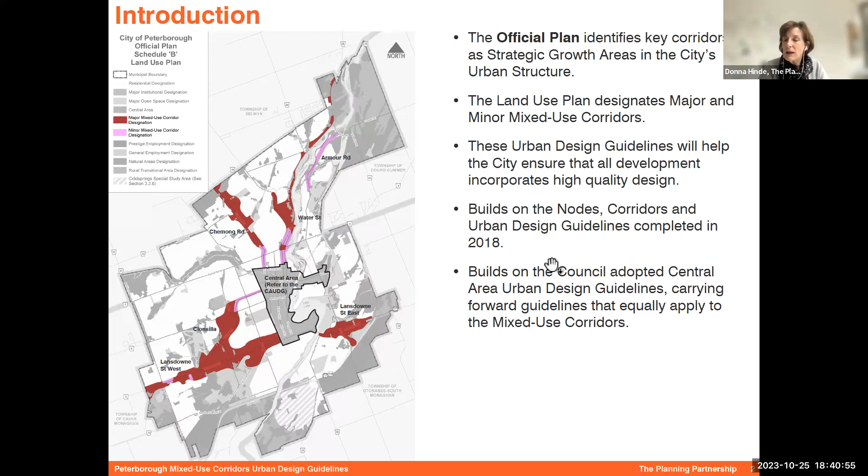That formed a bit of the foundation of the official plan. So what you're going to be seeing tonight builds on the guidelines already adopted by council for the central area, and we carry forward any of them that are relevant to these corridors into this document we're looking at tonight. The guidelines are intended to help staff evaluate applications when they come forward.

How well are they meeting the various guidelines outlined in this document? It's intended for city staff to use for their own projects to guide more detailed planning and design on streets and parks and trails. They're intended to provide greater clarity. We often hear, especially from the development industry and their consultants, just tell us what you're looking for. And so that's the intent of these guidelines.

Clearly lays out what the city and council are looking for. They are inherently flexible, so it depends on having great conversations, great collaboration by a very talented city staff team and an amazing suite of consultants already working in Peterborough. They reflect the best planning and design principles from our decades of experience developing guidelines like this.

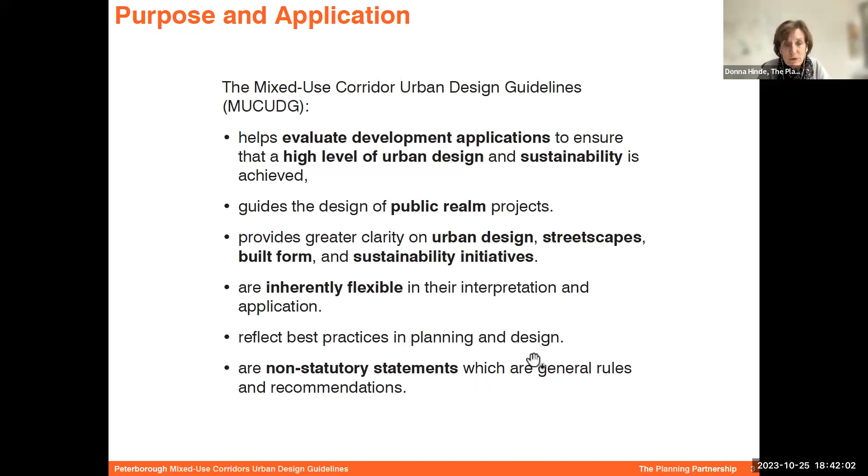So it's really important to remember they're non-statutory statements, general rules and recommendations. The foundation of the guidelines is based on a notion of compatible development. They are intended to help develop projects that reinforce the desired future and existing character of neighborhoods along the corridors. They're based on a contextual approach that considers impact and relationships on the context.

There is a definition in the city's official plan about what compatible development is, and it doesn't mean it's exactly the same or even similar to existing development, but it has to prove there's no undue impacts from overlook and shadows and impinging the scale of new development on old development. So it has to prove there's no impact on adjacent development.

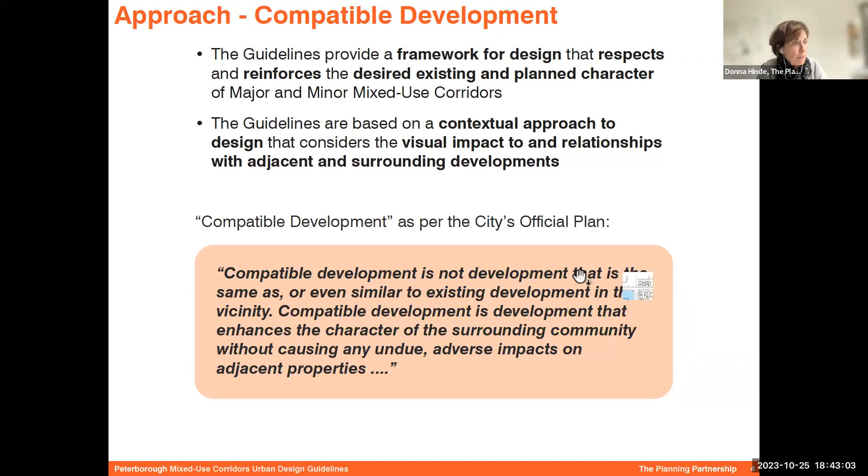So we developed diagrams to illustrate various scales, various areas you'd look at depending on the scale of redevelopment proposed. If it's major or large scale redevelopment, as on the left of the screen, this light blue area - the dark blue suggests that site is being redeveloped - and so you would consider the impacts within this large blue area to make sure the development being proposed is indeed compatible with everything within that light blue area.

If it's more minor redevelopment, you can see exactly the same map, but when it's more minor, we're looking at several blocks in each direction. And if it's just redeveloping one house on a lot or an extension or adding some kind of addition, then it's just the immediate properties that abut that site. So it's really important that scale of influence area is responsive to the scale of development being proposed.

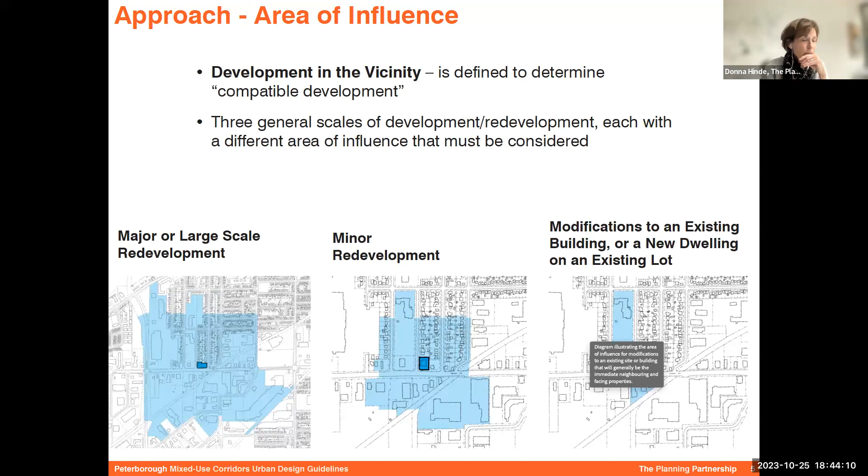Guidelines have 6 principles that are foundational: trying to make connections along the corridor and to key features and destinations off those corridors, to define gateways and entrances so the corridors take on a bit of their own special, unique character, and that we make streets for people.

Along the corridors now, it's a very harsh environment for people that dare to walk on the sidewalks or ride their bikes. So we're trying to make it more pedestrian and cyclist friendly, making sure wherever there's views to significant places that they're protected, that we foster a unique sense of place on each corridor, and that, like everything we do in Peterborough, the projects are inclusive and equitable.

The mixed use corridor urban design guidelines, MUCUDG, have 5 main chapters, and I'm going to walk through each one individually, then we'll pause. We'll talk about guidelines for buildings, green infrastructure for buildings and public places, tree planting guidelines, street guidelines, and guidelines for parks through redevelopment on the corridors.

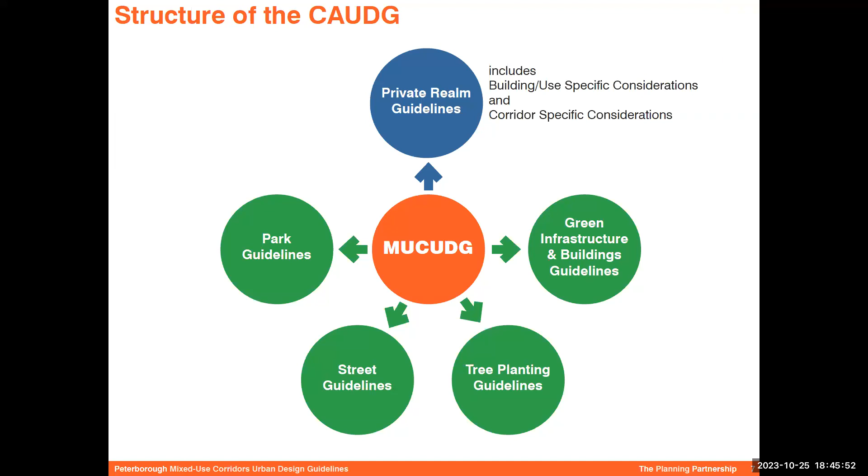So just before I get into the content of the private guidelines, any questions or clarification required on the introduction, how it's set up, the purpose of the guidelines, or the subject area of the guidelines? Okay, I'm going to push on.

We're going to start with the private realm guidelines. Private realm guidelines are for any development that's privately owned. So we look at recommendations for anything to do with the building, where it's located, placed on the site, what its height is, how bulky it is, where signs are, what special features could you add to define landmarks. We look at a whole suite of recommendations for the site.

Where do you access parking lots? How is that site serviced? How is it landscaped? Where might public art be located? We have specific direction for specific building types like townhouses, stacked townhouses, mid-rise, higher rise, commercial buildings, automobile focused uses, drive-throughs. These are the kinds of buildings we're anticipating will evolve along the corridors over time.

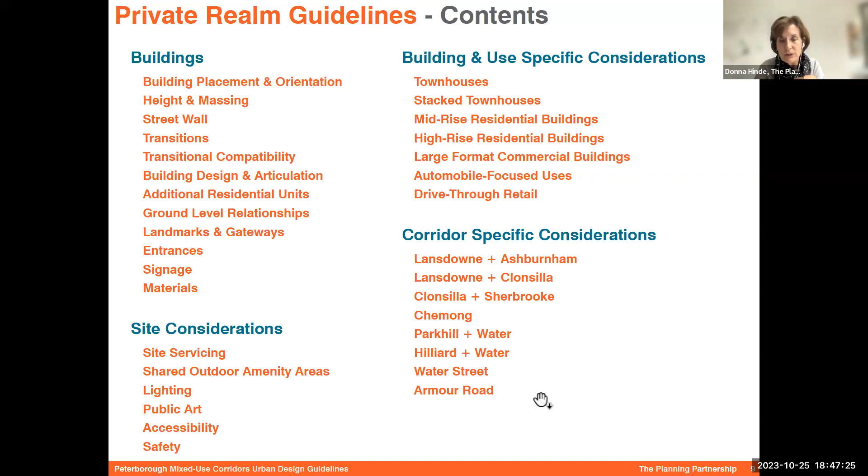I see a question in the chat box about how the guidelines are flexible, so I'm going to show you a couple of examples along the way to demonstrate that. In this section, we also have specific considerations for the various corridors where they have specific conditions or characteristics that are worth responding to in the guidelines.

I'm going to walk through the recommendations for building placement and orientation. The reason we pay special attention to this in the guidelines is because it's one of the biggest components of defining the character of the street. So if we can start to define these big roads with buildings as opposed to large swaths of parking lots, it changes the character of the street.

Wherever possible, we're wanting to bring the building as close to the street edge as we can. The height is another tool that can help reinforce the character of that street edge and make a more appealing street experience. So we're looking for opportunities to add some consistency of height and mass of buildings along those corridors as they evolve over time.

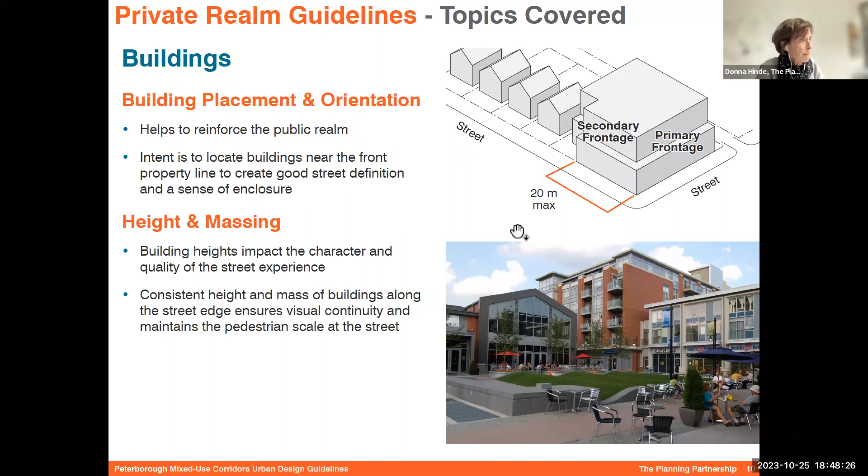The street wall - we're defining what that is: the front of the building. We're recommending a 2-story minimum, and that above 4 stories, the building would step back. This is so the taller buildings don't impinge their scale on the sidewalk and people walking on that sidewalk, helping make a more appealing environment there.

We want the building facades to be articulated so that it adds some interest to the sidewalk. We don't want just blank concrete block walls slammed up to the edge of the sidewalk. We want there to be windows and doors and some articulation in materials along that facade.

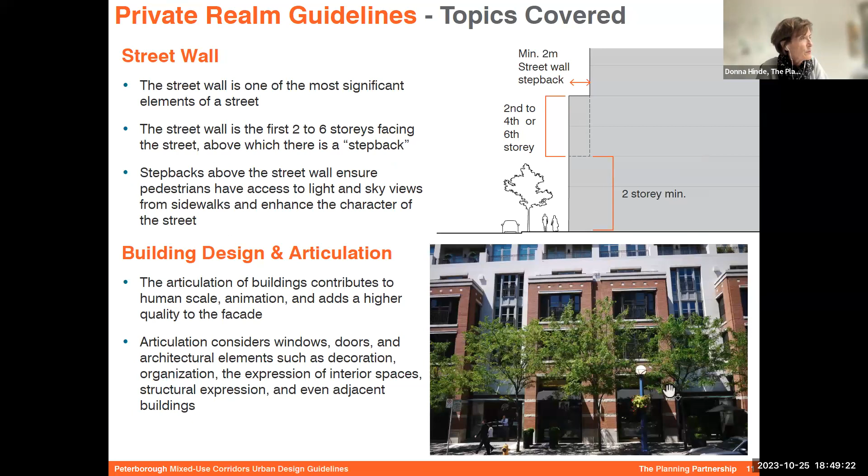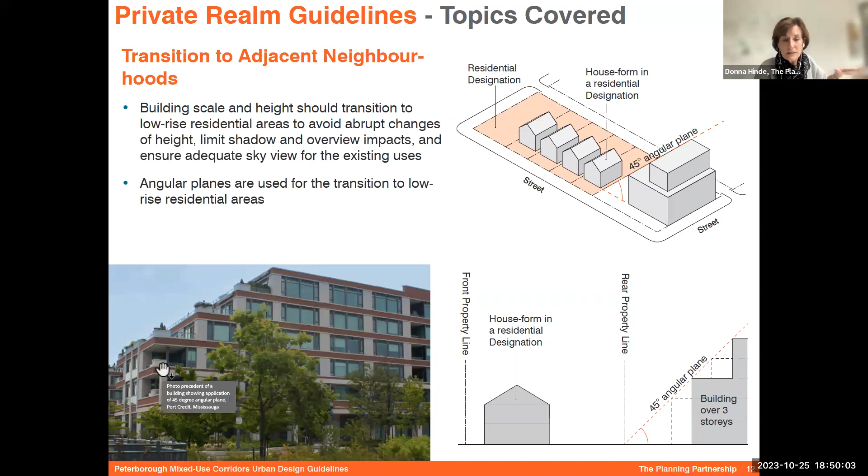For site access, let me go back to transition. We are particularly mindful that when the corridors' frontage redevelops, many times they abut residential neighborhoods or other neighborhoods. So we want to make sure there's a transition, especially if there's higher density on those corridors, to the adjacent neighborhoods. We're applying a tool called an angular plane, which helps shave the building back, especially on the back, so there's a gentler transition to buildings that are often of a lower height. You can see in this photograph where the building is stepping down, transitioning to an adjacent neighborhood with lower buildings.

The guidelines address where driveways come in and where parking is located, because as I mentioned, parking is the single biggest element that destroys the character along a street for people that are walking and cycling.

Often if there is higher density development, there might be new forms of open space. Some of that new open space can be shared amenity outdoor areas, and we want to give some direction for that. Lighting should be fully integrated into the development, dark sky friendly, and make a positive contribution to the character.

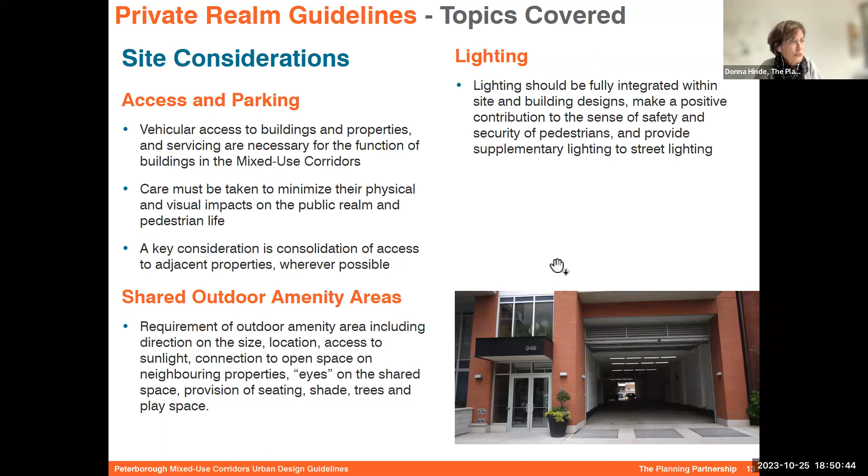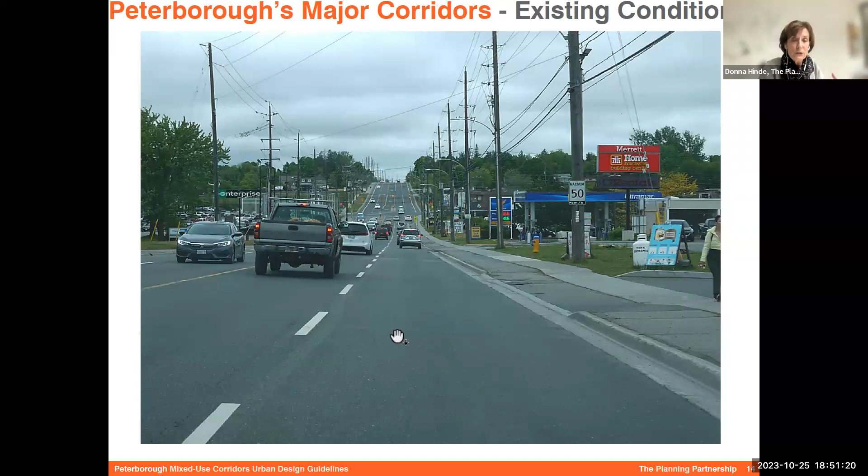When we look at the corridors on Peterborough, this is typical of the kind of condition. They've evolved through the 50s and 60s, when we had completely different priorities and pressures than today, where the city is trying to accommodate new, more people, a different form of development, and a more urban character on these roads. Across all of Southern Ontario, every municipality we're working with is struggling with the same thing, putting together direction that can guide the long-term evolution of corridors like in Peterborough.

I put this one in, a screen capture from Google Maps in Markham - this is Highway 7, equivalent to any of the big roads in Peterborough. This is a plan view of a development on Highway 7, and I'm marking out where the buildings are along it. What's intriguing for me, looking at it a second time, is all the green roofs - that's a kind of thing that can be recommended in the guidelines.

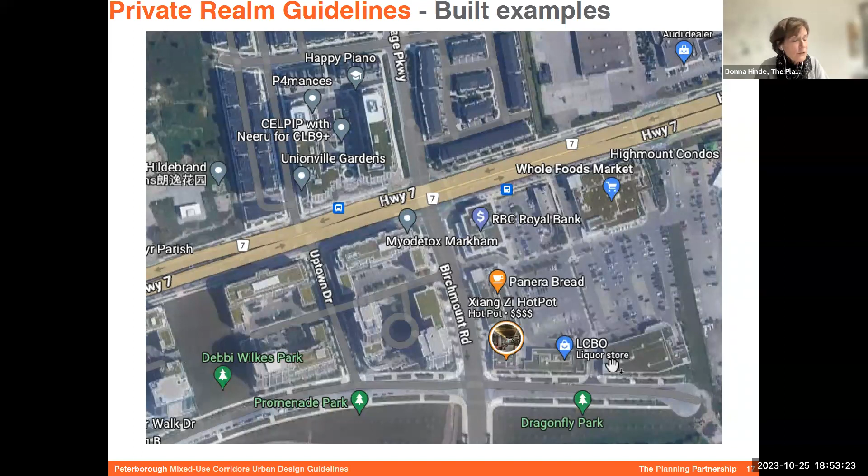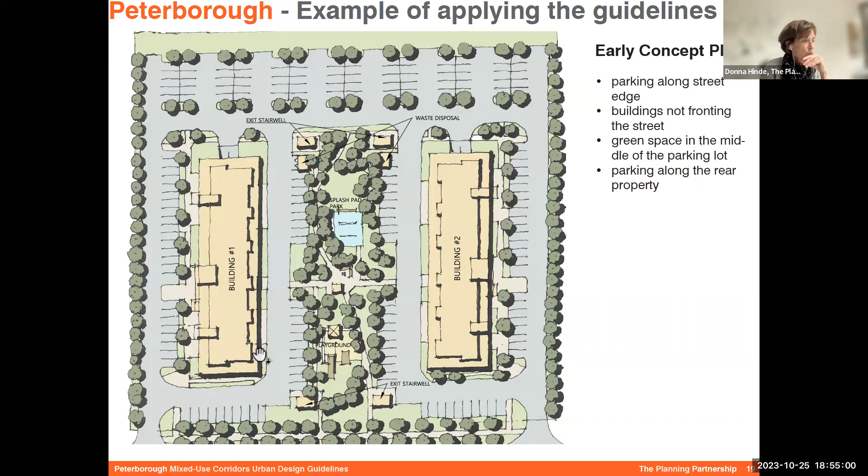I want to go back and share an example of the city already applying the guidelines in its early iteration - a development application they got for a site on Lansdowne. This was the first plan that came in from the consulting team. It had residential buildings perpendicular to the street, with parking along the street - Lansdowne is at the bottom of the page. They rightfully showed a clear sidewalk lined on both sides with street trees. They have parking across the back, which sometimes doesn't make a great transition to adjacent uses, and their open space is centralized as well, along with parking.

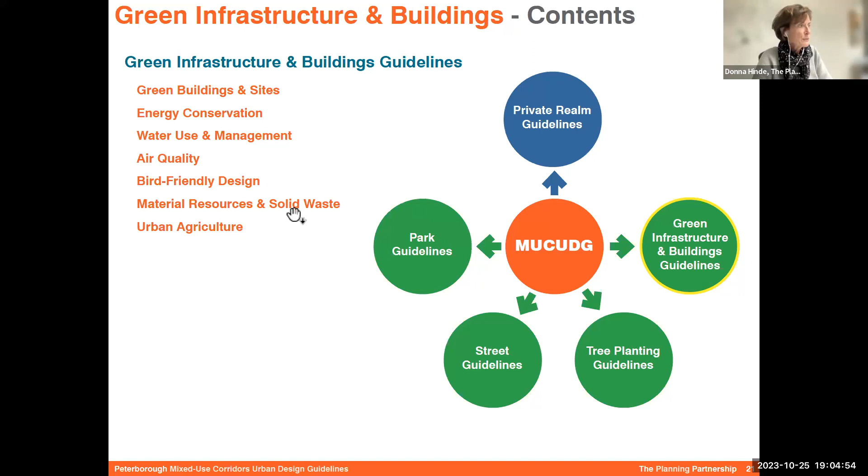Green walls, solar panels, water use and management — we're looking at reducing impervious surfaces wherever possible so more stormwater can be absorbed, reducing and treating runoff to protect the natural water courses.

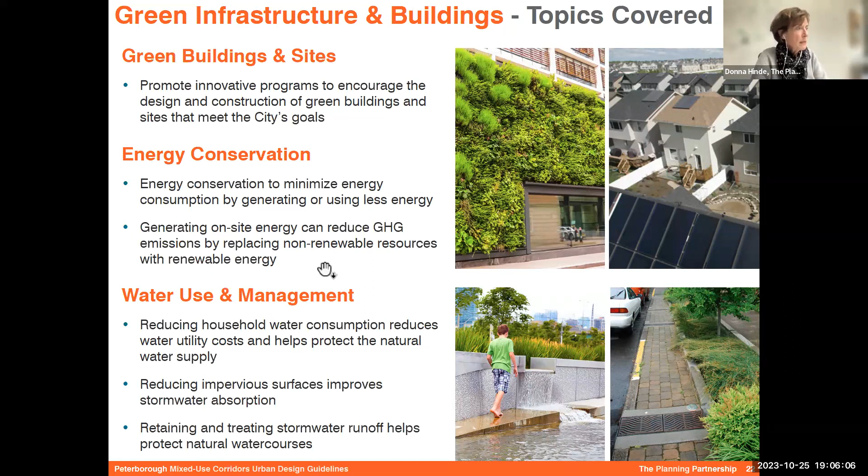Energy conservation: we're looking at opportunities wherever we can to generate on-site energy to reduce GHG emissions and replace energy sources with renewable energy. The guidelines speak a bit about air quality.

They talk about bird-friendly design by considering light pollution. We also talk about material resources and solid waste.

We're looking at when development applications come forward that they have an idea of how they're going to maybe reuse materials that are already on the site.

And urban agriculture, such as community gardens, wherever there's an opportunity to incorporate community gardens into parks and public spaces. That's a terrific use for green space, and it can often be a great transition between uses.

That's just a quick summary of what we have in the green infrastructure and green buildings chapter. I'll just give it a second to see if anybody's raising a hand or putting something in the chat.

So a question in the chat box: how will the programs to encourage green buildings, net zero, be developed, and when? Maybe Nicole or Caroline, is that a question? Do you have guidelines for achieving net zero?

Yeah, I can briefly touch on that. That's kind of extending a bit beyond this guideline. While we do touch on it, we are kind of encouraging it. This is certainly not the document that's going to prohibit or require. It's not forceful statutory requirements, as we talked about.

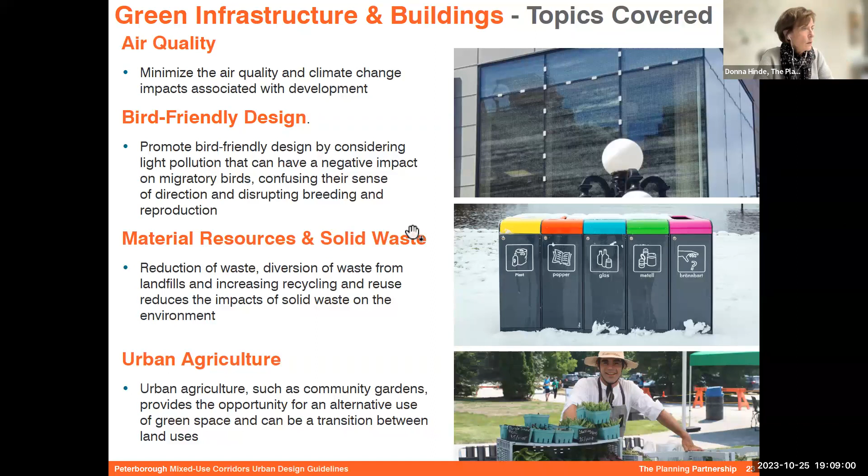Okay, let me push on to now talking about the tree planting guidelines. While we were preparing these guidelines, city staff were also doing a separate document to update the city's tree planting guidelines for across the city, so we were working in tandem with the direction they were developing for the city's own tree planting guidelines.

So in the mixed use corridors, we're looking at the urban forest as a system: the species that we're selecting, where trees are located and how they're spaced, the special soil required, the planting typology details, specific planting in natural areas or along the water's edge, and then recommendations for tree preservation.

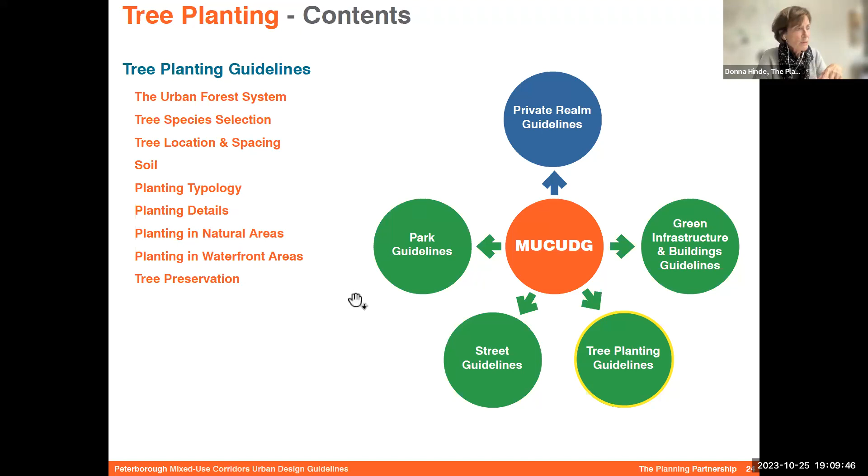With respect to the urban forest, the guidelines are intended to promote the principles of biodiversity and growth rate stratification when selecting tree species, so we want variety. The intent is to establish a resilient urban forest with a diversity of species.

And we know that this is a priority for the city, where the guidelines address species selection, the intent to avoid monoculture plantings. The tree species selection intended to support the potential for mature trees, so that the trees are going to be healthy from the point at which they are planted well into maturity.

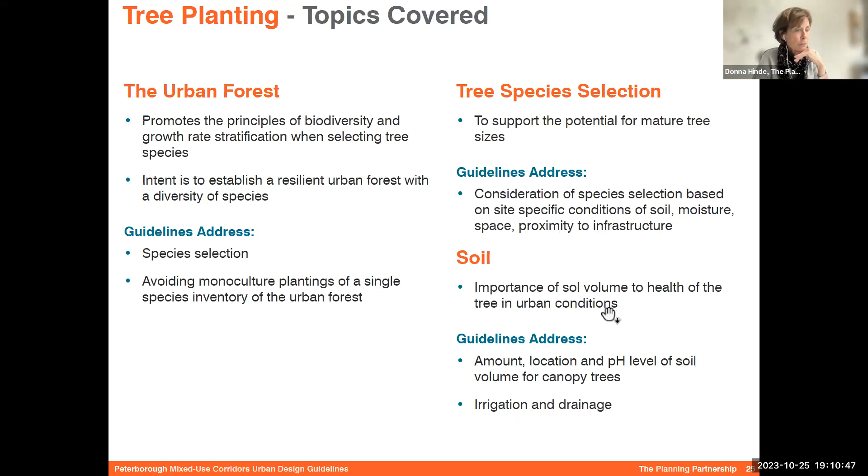The importance of the soil composition and volume to health - the way landscape architects and arborists plant trees now is completely different than it was even 10 years ago. The planting typology includes the use of structural soil cells to make sure there's sufficient volume.

The details - like I mentioned, the city's been doing a terrific job updating their citywide tree planting guidelines, so they've got a terrific amount of detail in that document that our work cross-references.

There's some recommendations specific to particular landscape types, whether it's in and around a natural area or along the water's edge of the river.

Tree preservation: obviously all opportunities to preserve trees are looked at early in the approval process, that the value is appraised, and that the preservation is based on identifying the critical root zone and protecting it through construction.

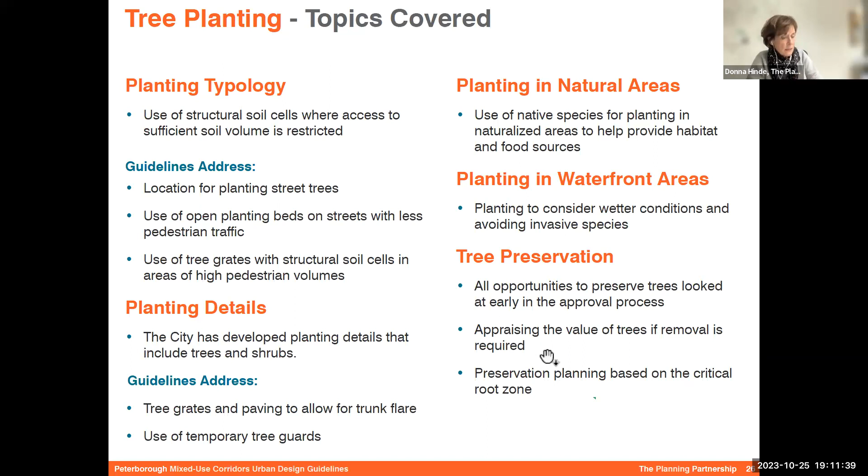I believe, yeah, that's the end of the tree planting section. I see we have a couple of questions in the chat box.

Province changes to our OP. Are these affecting the guidelines? And can we include wider scope in the guidelines than permitted now? Not sure, Nicole, if staff have really had a chance to digest the changes that came out this week.

Yeah, I can speak to that. Right now, what the province has announced, our understanding is it's just looking at the just over 60 modifications that they made. From a brief high-level look, we haven't dove into it deeper, but previously when those modifications came out and we were adopting the central area urban design guidelines, we reviewed them and there were no material changes required. We have 45 days to get back to the province and present the city's position on that new information, so we will be reviewing these guidelines to make sure no modifications are required, but we don't believe that to be the case at this moment.

And then in terms of climate resilience, I know that's something that came up during the official plan process. Yeah, so there's policies in the official plan that encourage climate resilience. Again, it's not covered in detail in this document, but it's certainly a consideration, and something the city would be looking to incentivize and encourage. It's not something right now under the current Planning Act legislation that we can require through site plan approval or other planning approval processes. But as we develop more policies, there may at some point be statutory requirements, or there may be incentives the city will put forward. The climate action plan is also currently being updated by the city, so we would look to that document to further inform climate resilience considerations.

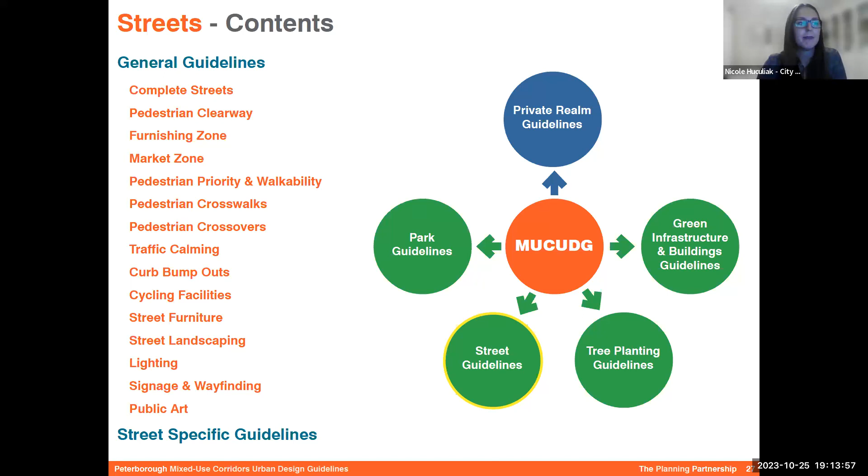Okay, and then the question about reference to tree species. The city's document that they were doing in tandem with our work is called Tree Planting, Installation and Establishment and Recommended Species List for Street, Park, and Site Plan Trees. So they've done quite a lot of work on identifying suitable species for various locations.

Okay, let's push on to the street guidelines. For each one of our corridors, we've started with some general guidelines that address many of the same component parts as the central area urban design guidelines, from identifying areas of pedestrian priority, the need for street furniture, and the role of cycling facilities and lighting.

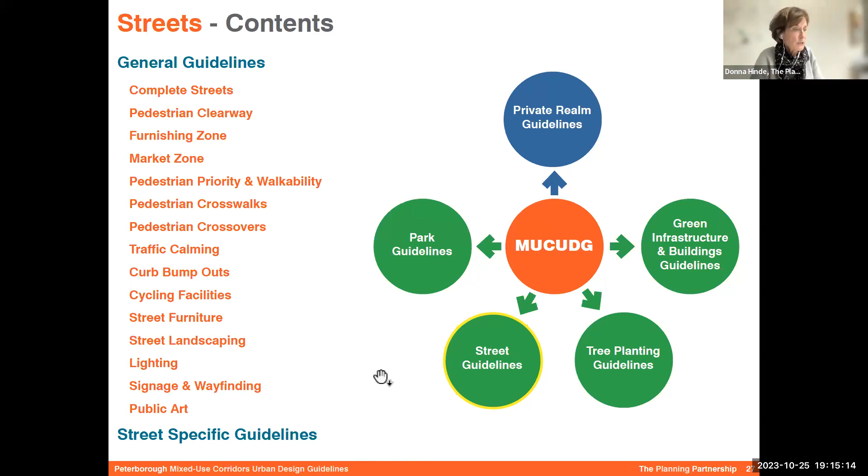But in the end, we also include street specific guidelines. We've gone through 13 different sections on the mixed use corridors. We start with a fundamental notion of complete streets, recognized in the city's own transportation master plan, designed to accommodate all users on the street, to make safe places for pedestrians, cyclists, all modes of travel, cars, buses, trucks, and how they can be designed as a complete and connected network.

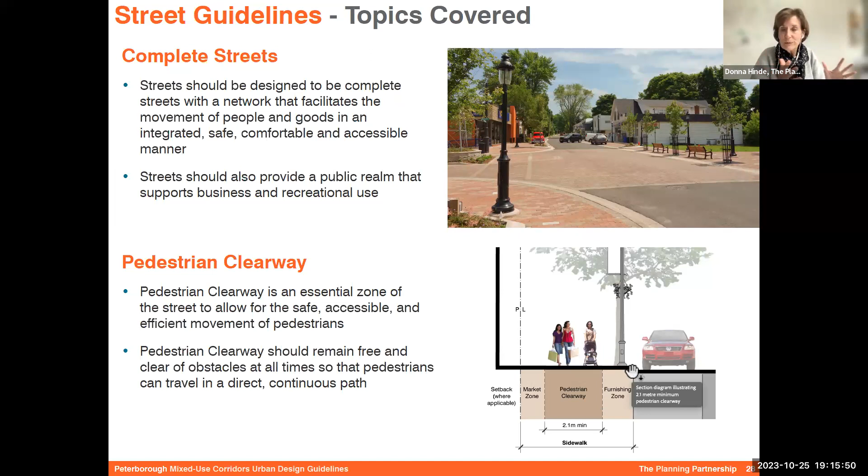The streets generally will be working hard to make sure there's a clear zone for pedestrians along the sidewalk, and along that pedestrian zone, a zone where trees are planted and often street furniture is placed. And if there are conditions along the corridor with adjacent street facing retail uses, we look at opportunities to have a bit of a market zone along that building frontage.

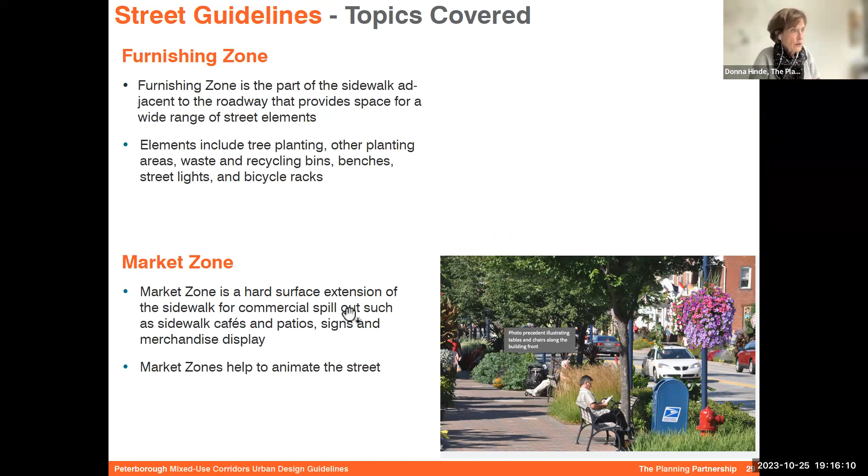Pedestrian priority and walkability is a priority because of the harshness of conditions along most of these corridors. So wherever there can be clearly defined and identified crosswalks and crossovers, where there can be priorities for people to walk, where there's medians or spaces in the medians so pedestrians can safely cross multiple lanes of traffic.

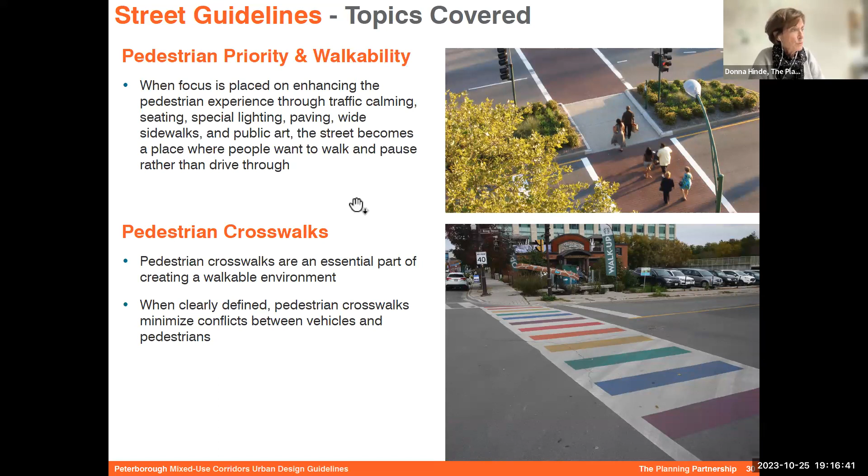One of the questions earlier was, is there opportunity for traffic calming to reduce speed? And absolutely, that will be done on a case-by-case basis as these roads come forward for more detailed planning and design. I'm sure the urban design team and planning team will be looking at every opportunity to add additional landscape and measures that might cause traffic to slow down a little bit.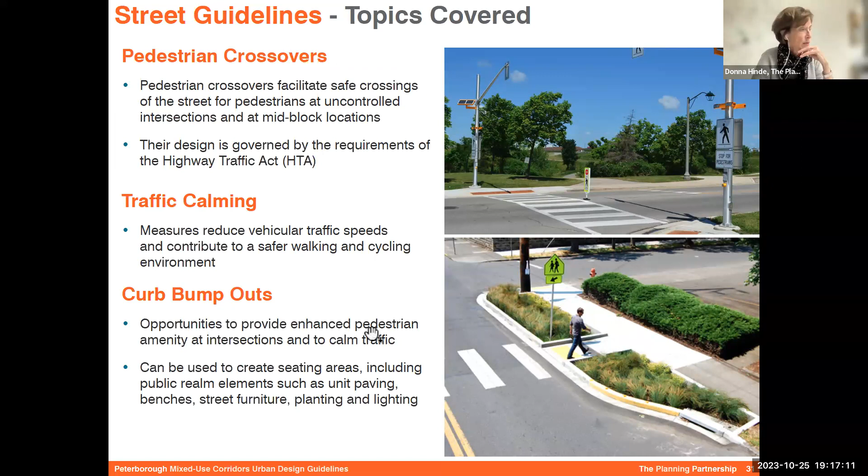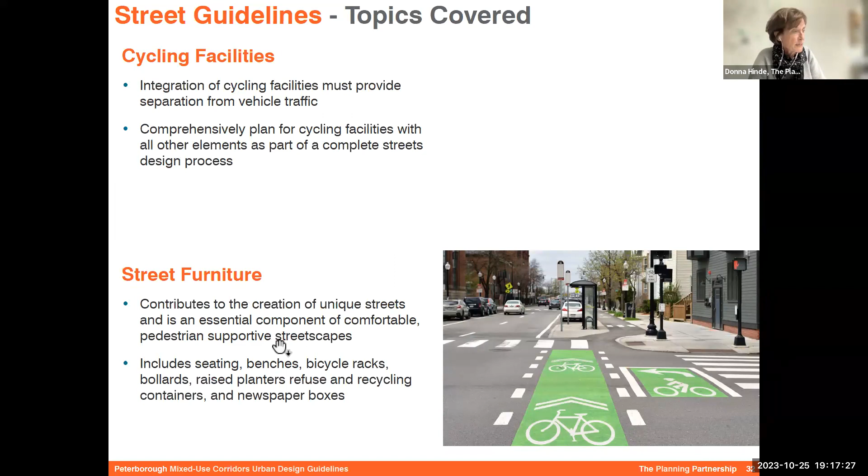Cycling facilities should be clearly marked on the ground and identified through signage. Wherever street furniture can be accommodated, it should be added - benches, waste receptacles, bicycle racks, planters. There should also be signage and wayfinding, especially along these big corridors where it's often difficult to figure out where you are in the city and which way is to City Hall, Little Lake, the mall, or Winners.

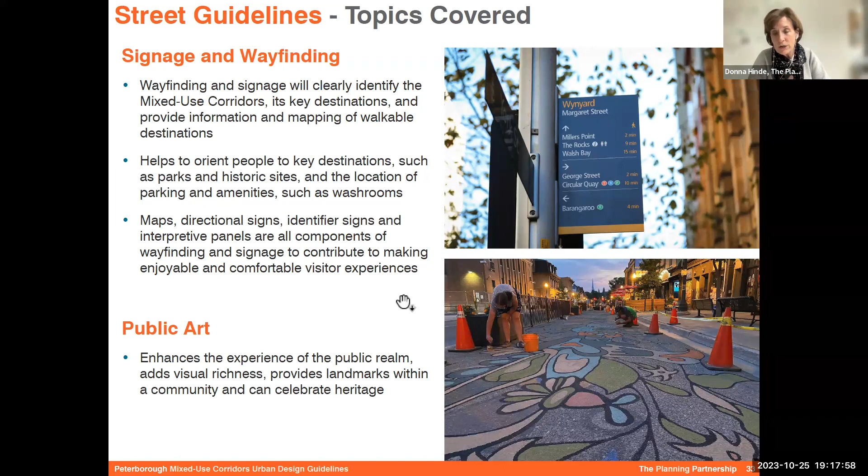So signage and wayfinding are really important at a scale suitable for some of these big environments. And not to forget the role of public art in helping to identify and mark these places as special and unique.

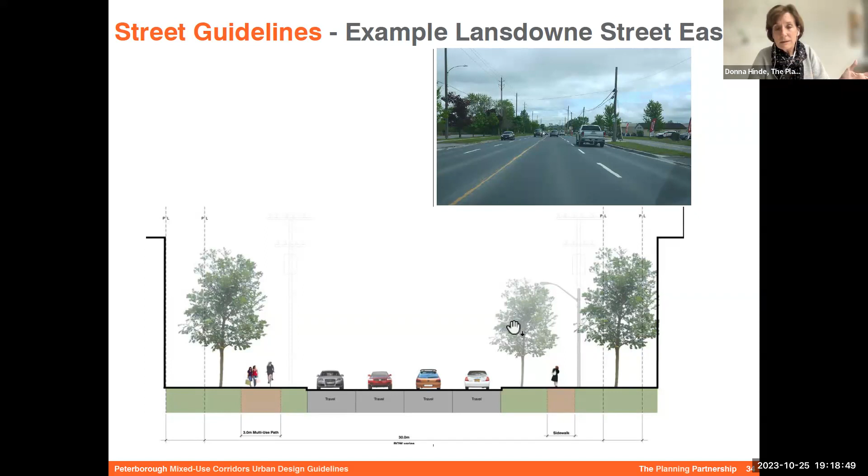So this is an example of the cross sections that we developed - I think there are 13 in total - where we look at various segments of the street. Then we allocate the space within the public property, within the road right of way, for streets and sidewalks, and sometimes mixed use paths for cyclists and pedestrians, and how travel lanes can be allocated within the real estate of the right of way. Sometimes we identify locations for trees that might be on private property, but that's where they can contribute to making the landscape along the corridor even better.

So, pause for a second on streets - anything in particular on streets? For cycling on roads, are there specific design guides for cycling infrastructure within the overall street design?

So we make some recommendations for the location of cycling lanes, but that will be further developed through subsequent, more detailed planning studies. And I know we've always had interesting conversations when it comes to cycling lanes on the street - Nicole, I don't know if you want to weigh in a little bit.

Yeah, so through this project and the streetscape designs, we're looking at the ultimate right of way and how to incorporate sidewalks and mixed use pathways, but we would not get into the detailed design of bicycle lanes. For that kind of detail, I would direct you to the Transportation Master Plan, which the city has been working on concurrently. We've coordinated this document with those working on the Transportation Master Plan so that they're not conflicting but complementing each other. That would be the document that gets into more specifics.

And Nicole, maybe you can help me answer the question from Sue about incorporating Indigenous languages in the wayfinding and signage in the city. I'm not sure if the city's developing a new protocol.

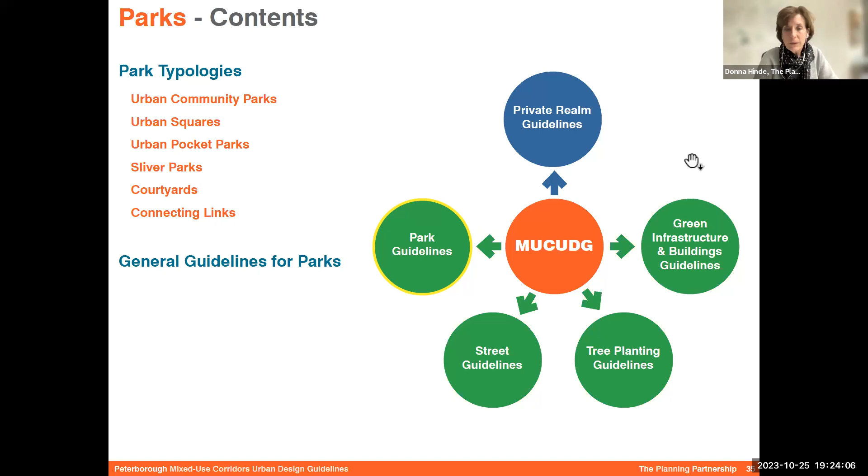All right, the last chapter of the document is park guidelines. We look at introducing urban park types that were first introduced in the official plan. It's a whole new hierarchy, a more urban character of parks. Along with community parks and neighborhood parks, the official plan said that with more urban forms of development, you're going to see more urban types of parks - urban community parks, urban squares, and one introduced in that development application example I showed earlier: urban pocket parks, which are smaller urban squares, urban parks, sliver parks, which may be narrower green spaces on private property that function as public space, courtyards in buildings, and connecting links, which could be green linear parks that connect one developed site to another.

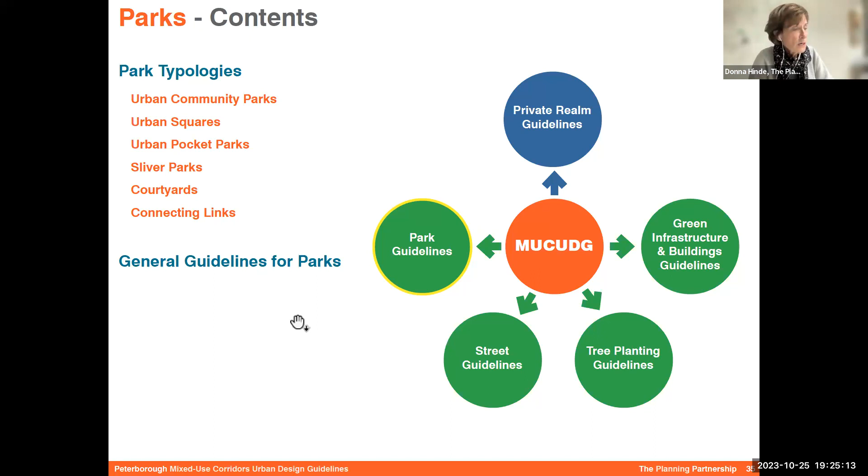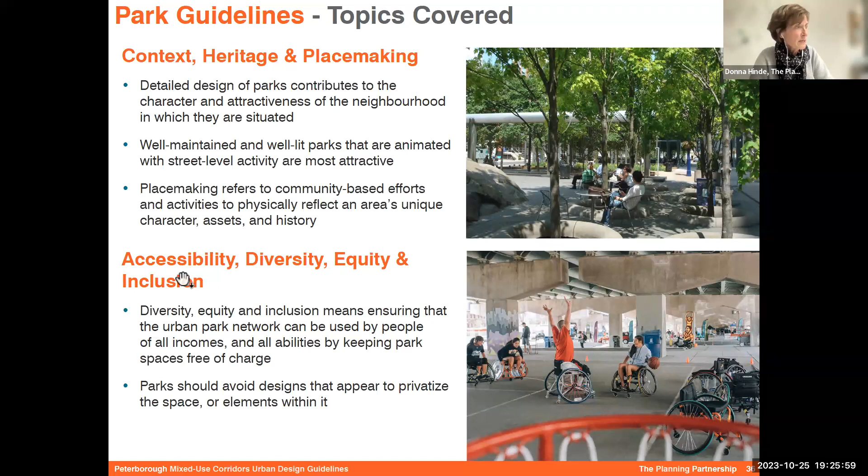Then we have general guidelines for parks in this section. They talk first about the context for that park and how it contributes to the character of the development, that it will be well maintained, well lit, animated with activities and programming. There will be placemaking that reflects community-based efforts and activities to activate that space. The city has really thorough policy on accessibility, diversity, equity, and inclusion, and they worked with us throughout development of the guidelines to make sure our recommendations reflected everything important with respect to accessibility, diversity, equity, and inclusion in the city's public spaces.

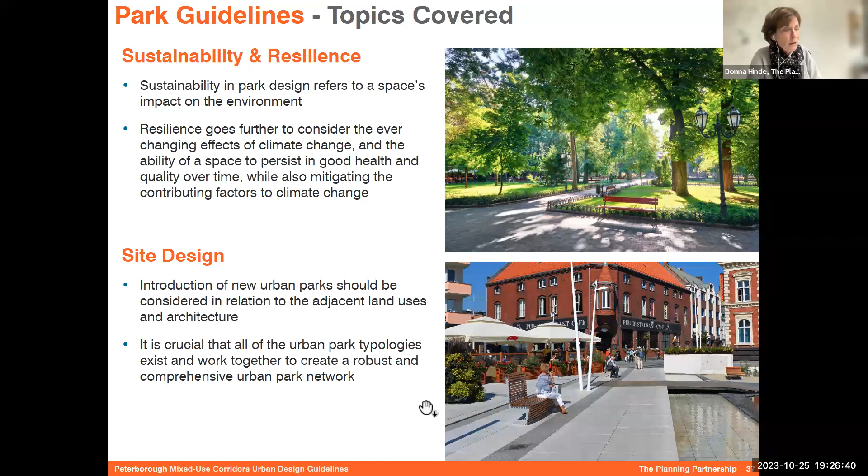Sustainability and resilience - we want to make sure our parks are doing whatever they can to mitigate the factors of climate change. It's important that when we're introducing new urban parks, they have to be designed within the context of all the development around them, so they make sense and relate to the adjacent buildings, with windows and doors that overlook those urban spaces to keep them safe, and that those smaller urban spaces are part of a bigger system of urban parks in a new neighborhood.

I mentioned the importance of programming, the flexibility, the variety of programming. One recommendation is about seating - being open to considering a vast array of seating types in urban parks. Along with seating, there's picnic tables, waste receptacles, light standards, bike racks, and a whole suite of elements that finds its location in urban parks.

I have one more. The role of lighting in our urban parks, making sure they're safe and secure for people to use. Public art is a very important component often in our public spaces, and it can contribute to creating a very special location in public parks. Public art can be incorporated into paving, into the design of street furniture, into the design of buildings - it doesn't have to be standalone installations. Then there are other features incorporated in parks, like public washrooms, intended to support a whole range of activities.

I see, Joanne, you have a comment in the chat box, which is not really the topic of mixed use corridors - I think this is going back to the central area urban design guidelines. So Nicole, I'm not sure if you want to weigh in.

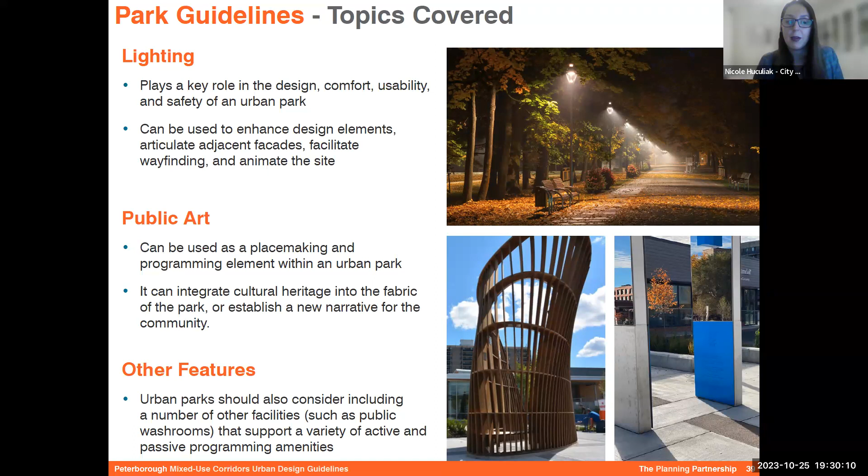I think the project we used as a case study earlier is a really great example, where we had a very willing group of consultants that wanted to work with city staff and implement the urban design best practices that we know to be true.

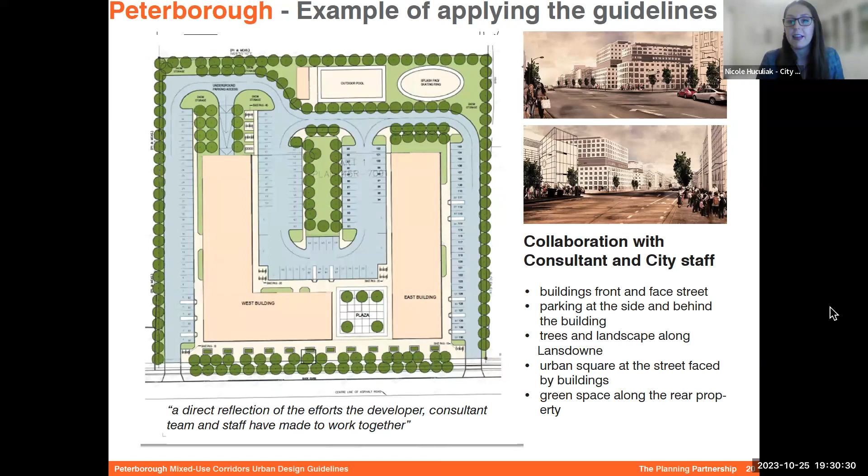Another really great example is the Y Lofts. It's in the central area, but I think that's a common project a lot of people are familiar with, where there wasn't necessarily requirements, but there was adaptation and a willingness to adapt the original design to implement things like step backs, materials, articulation, and enhancements to the streetscape.

So right now, all of those things are encouraged through development. Sometimes there are statutory requirements where if you're going through a zoning bylaw amendment process or an official plan amendment, the city can require things. Sometimes if it's just through site plan approval, it's more about recommending and trying to incentivize.

One thing we are looking at is other urban design incentives, whether that's urban design awards or actual city contributions, similar to our facade improvement grant, where if you meet these requirements, there's a kind of cash incentive towards your project and a contribution.

So it's finding a balancing act, and part of that is having discussions with our development community about what it will take, I guess, for them to implement these policies in their ongoing projects.

All right, terrific. Well, thank you very much, everyone, for giving us an hour and a bit to let us walk through the content of these guidelines. It's really important to let your elected councillors know - Councillor Parnell is on the call and participated in a session we had yesterday. We know council is interested in learning about the guidelines and what they can and can't do. So it's important, like you say Marilyn, that you don't want to be stuck in the 1960s. Let your councillors know that, because they certainly hear from the development community.